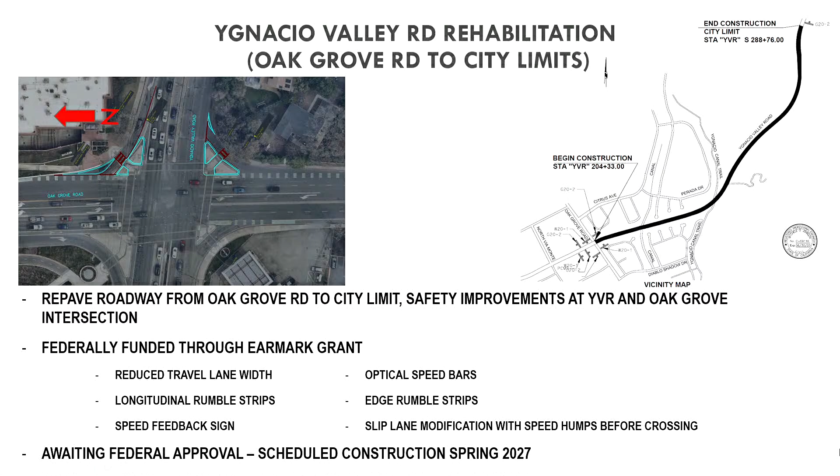Next, I have 2 projects to present here: both the unsignalized pedestrian crossing improvements and the trail crossing improvements project. The project scope includes the addition of rapid flashing beacons at the pedestrian crossings, as well as passive detection at the trail crossings.

This is funded through traffic impact fees and supplemented by the TDA grant, which we were awarded. Pedestrian improvements are at roughly 13 crossings, including Civic Drive, Tice Valley Boulevard, Bancroft Road, North Main Street, and Mount Diablo as well.

Trail crossings include the Contra Costa Canal Trail at Jones Road, as well as the Briones to Mount Diablo Trail at crossings at Larkey, Buena Vista, and San Luis Road. This is in efforts to increase visibility of pedestrians and trail users at crossings and lower vehicular speeds. We are currently in construction for this project. Thank you.

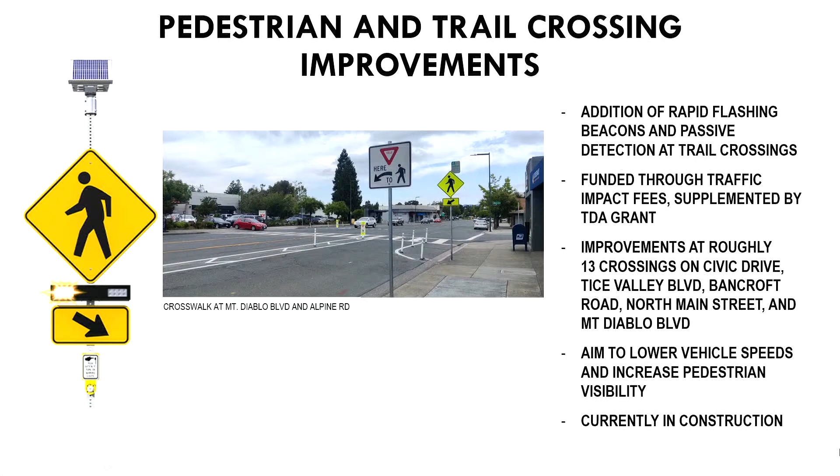Good evening, Commissioners. I'm Uriel Dominguez, with the CIP division. Today I'll be going over the project I'm managing this year, which is the 2026 slurry project.

This is funded through Measure J and the gas tax. This year we'll be slurry sealing approximately 43 streets in the Tampico, Diablo Shadows, and Valley Vista area. As part of this project, we are enhancing bicycle and pedestrian facilities. A good example of that is on Montego Road.

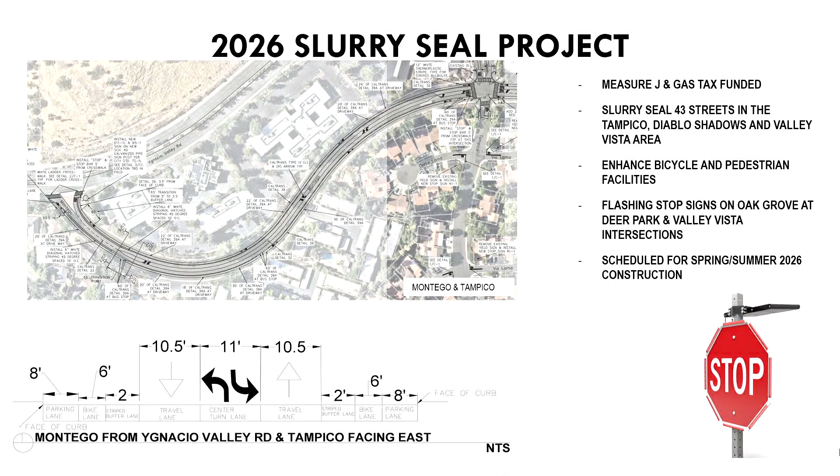Good evening, Commissioners. My name is Andrew McDade, I'm also an engineer with the CIP division. The project I'm managing, which was just awarded for contract this past Tuesday night, is the Walker Avenue Pedestrian Improvement Project. This will install curb extensions just east of the Iron Horse Trail crossing on Mount Diablo across Walker Avenue. We'll also reconstruct the curb cuts here, improve the landing, as well as ADA accessibility.

This will improve pedestrian visibility and reduce the crossing distance. Also at this location, we will raise the crosswalk a bit to create an undulation that will slow motorists down, especially coming around Walker from the east around that curve there. In addition to these improvements, we're also installing some reflective curb paint and upgrading the striping and signage, as well as installing an additional streetlight at this location.

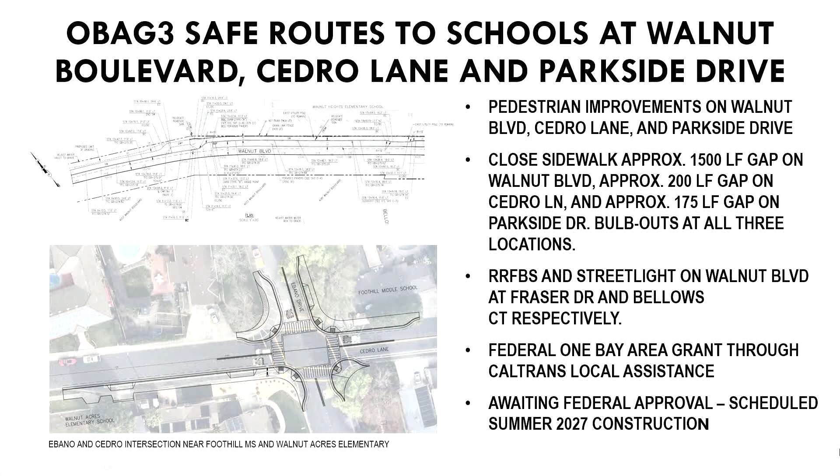And so with that, we've talked about our projects that are near construction, and we have a map here to show the various locations. I'll open up to any questions or comments before we move on to the next section.

Okay, great, thanks. So we'll open up for questions from the commissioners. First question on the bulb-outs - you're talking concrete, like raised sidewalk islands, correct? Yeah, if you look at the bottom picture, that's all concrete right there. Okay, so it's hard improvements that are physically reducing the lanes.

Okay, and then on the Ygnacio intersection, that was the first slide - just curious, do we have updated counts of how many vehicles and pedestrians are going through that? Our counts are not very updated, I think maybe 2019. Oh yeah, well the world has changed a lot since then. What do we have to do to get updated counts, at least at a couple of these intersections, the major ones in the city?

That's something we can consider. Yeah, we have to hire a count company, so it's just operating budget that we have to use to get some data.

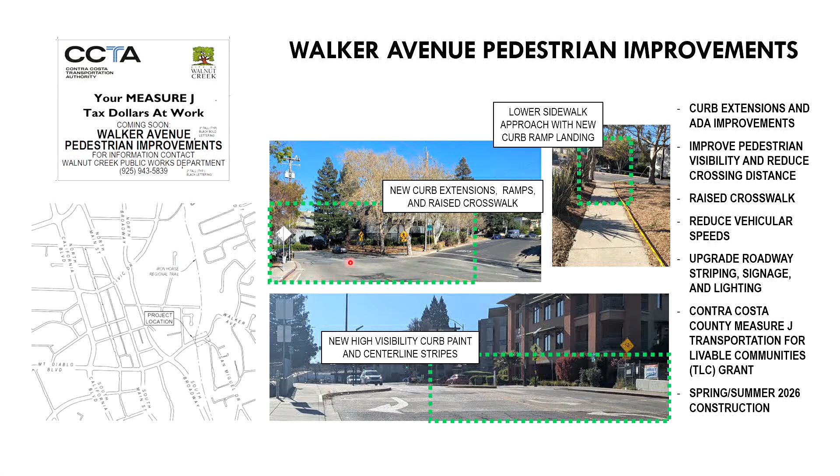So is the one that actually crosses the Iron Horse, is that also going to be raised? No, we don't have any plans for that right now. The only thing we'll be doing is painting some yellow reflective curb on the median there. That's more for nighttime driving than really any pedestrian benefit. But I think visibility is pretty good here. We have the bulb outs, but no, we don't have plans for raising that.

Okay, if we could leave this picture up, going back to the lighted signs, without a long time of questions, what's the process of choosing the street and deciding that one of those signs with the lights is going to go in? Which project are you referring to? So like the Iron Horse Trail crossing, right? It doesn't have a lighted sign right now, like what I'm looking at on this screen. Correct, that one does? The Iron Horse one does? That one does, yeah. Okay.

And these lights, when they get put in, is it a meeting? You guys just, how is it chosen? How are the areas chosen for those lights to go in?

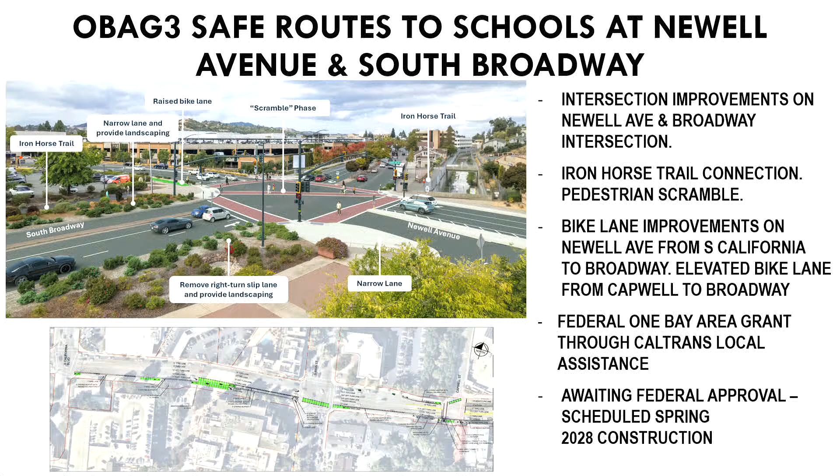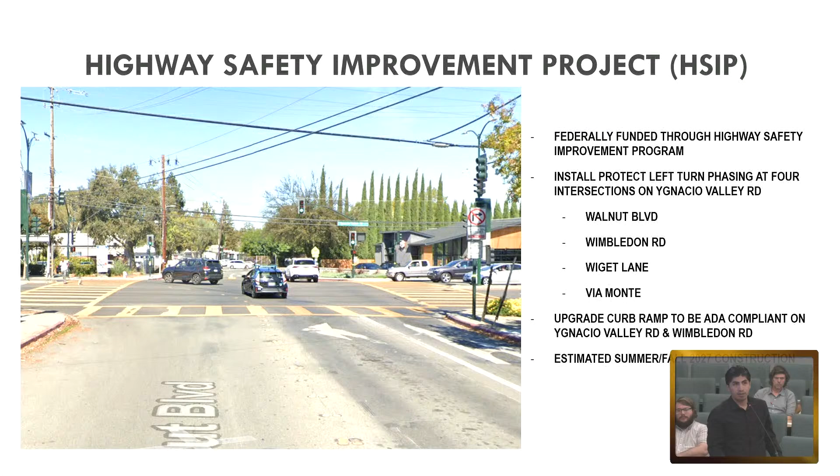Now for the Highway Safety Improvement Project, federally funded through the Highway Safety Improvement Program. This intersection is at Ygnacio Valley Road and Walnut Boulevard. We'll be doing essentially the same thing at Wimbledon Road, Wiget Lane, and Via Monte intersections, installing protected left turn phasing at all 4 intersections. The current condition is permissive left turns, as shown in the picture. We'll also be upgrading curb ramps to be ADA compliant on Ygnacio Valley Road and Wimbledon Road. Estimated construction is summer or fall of 2027.

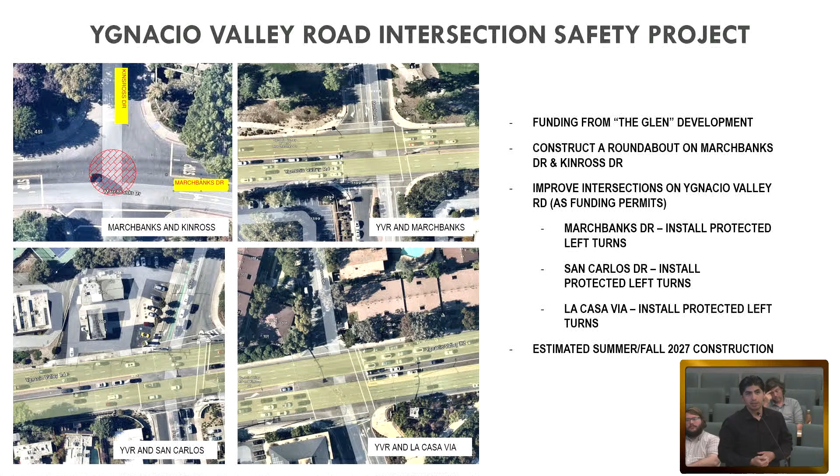The next project is the Ygnacio Valley Road intersection safety project, funded through the Glen development. Due to limited funding, we developed primary goals and objectives for this project, listed in order. Our primary goal is to construct a roundabout at Marchbanks Drive and Kinross, shown by the red circle in the upper left picture. Following that, as funding permits, our goals are to install protected left turns at 3 intersections: Ygnacio Valley Road and Marchbanks Drive, Ygnacio Valley Road and San Carlos Drive, and La Casa Via and Ygnacio Valley Road. Due to limited funding, we're prioritizing them in that order, and we expect construction in summer or fall of 2027.

Next up is the San Miguel Drive Pedestrian Path Project, a joint project between the City of Walnut Creek and Contra Costa County, currently in design. This is a county-led project, but we are responsible for improvements within our jurisdiction, funded through traffic impact fees. The intent is to close the sidewalk gap between San Miguel and Newell, up to San Miguel and Norris Road, providing better downtown access to residents in this area. Shown here is the intersection of San Miguel Drive and Andrea, where currently there's sidewalk on only one side of the road. We plan to install a 5-foot sidewalk, 8-foot wide parking, and 10-foot travel lanes where there is none now. We anticipate construction in summer 2027.

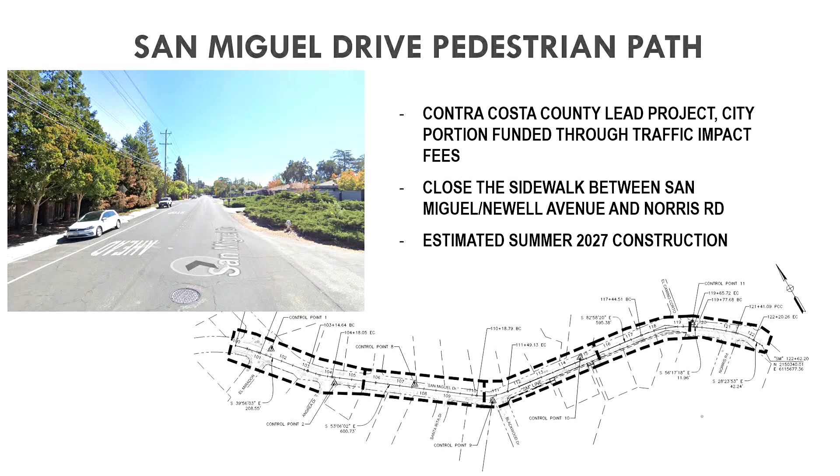Next, we have North Broadway improvements. This is funded through the Affordable Housing and Sustainability Grant. It's a redesign of North Broadway from Civic to Central, and we're aiming to right-size the corridor to better serve today's demand.

Right now, there are areas that do not have sidewalks along this corridor, and we plan to install sidewalks throughout, bulb outs at the intersections, Class 4 bikeways at sidewalk elevation, and reduce the travel lane width for cars. We anticipate spring, summer 2028 construction for this project.

This is going to replace the existing structure over Las Trampas Creek at South Main Street. It's going to be a 2-phased project. The first phase, we estimate construction in spring of '27, and it's going to build a pedestrian bridge, which will also act as a utility bridge on the eastern side of the roadway. The construction will have intermittent traffic impacts, but the road will be able to remain open.

Phase 2 of the project will be the following spring. Spring of 2028 is the estimated construction date, and that will remove the structure completely and be replaced with a new bridge structure. This is all under the Caltrans Highway Bridge Program, so it is funded through federal funding.

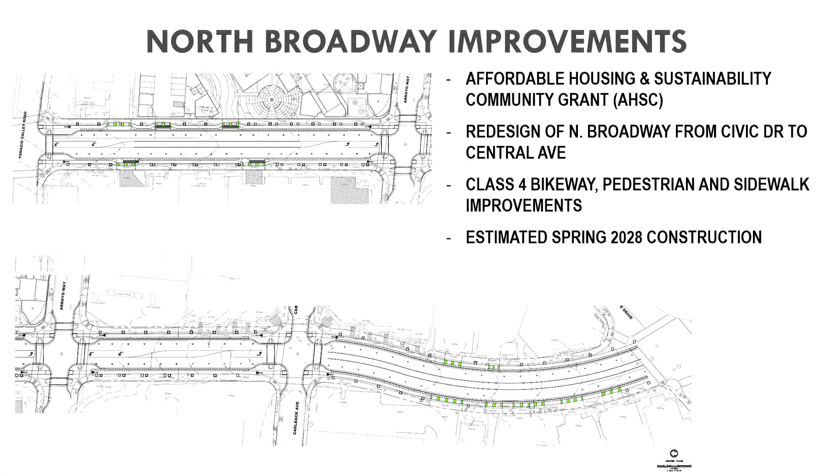And that's the first project. The second project I'd like to talk about is the bus stop improvement and shelter project. This is adding bus amenities to existing bus stop facilities and ADA access improvement at those sites. This is funded through the Contra Costa Measure J Transportation and Livable Communities Grant, as well as the AHSC Affordable Housing and Sustainability Community Grant.

We're going to replace or install shelters at 5 existing bus stops. These locations are at Ygnacio Valley Road and Marchbanks, Civic and Ygnacio Valley Road, Locust Street at Mount Diablo, South Main and Lilac, and the last one will be on North Main at Civic, right outside City Hall. The last, 6th location that we're going to be working on is just a mini plaza and ADA improvements at North Main and Bonanza.

That services our free trolley. One additional aspect on these projects is going to be real-time signage, so that the bus stop signage will tell users when the next shuttle or bus will be arriving. That will be installed on all 6 of the sites. Our estimated construction is spring of '27.

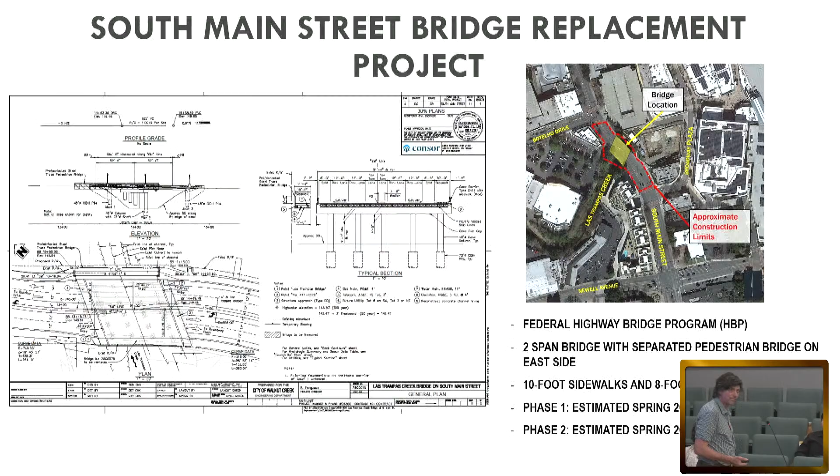Thank you. All right, was that all the projects, or you have more? No, I got 2 more. All right. Yeah.

This is the Parkside Drive multimodal improvements. The goal of this project is to provide improved multimodal access from the Iron Horse Trail to the BART station, providing an east-west connection from the Iron Horse Trail to the BART station. That's a connection I've been looking for a long time.

But really, the challenge of this project is to balance the different modes of transportation. Parkside Drive, from North Main to Civic Drive, is really a 4-lane through-lane street, and one of the lanes has to be converted into a multimodal use lane for this to work. So it's really about balancing what the impacts are going to be and seeing what's the best way to move this toward construction. Again, this is another Affordable Housing and Sustainability Community funded project, along with TIF, traffic impact fee funding. We're looking at this project for beyond 2028.

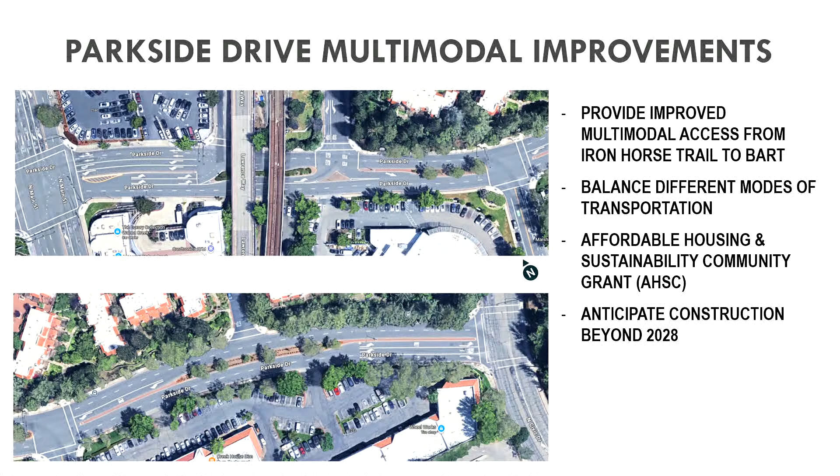So if you notice a theme between this and the Newell and Parkside projects, these are providing the east-west connections. We have the beautiful Iron Horse Trail going north-south, but again, the city lacks that east-west connection. So Parkside and Newell are trying to fill that gap. And for this, we are doing the analysis right now. We don't have results yet about which side or how these facilities would be on Parkside. And absolutely, there needs to be an outreach component, which will happen once we learn a little more about the options.

Okay, sounds good. Thank you so much. All right, Commissioner Guerrero. Thank you. So I want to stay on this one real quick.

So we're talking about the Iron Horse Trail that's down below Civic in the far right of the screen. Yes. And we want to bring that access to be able to cross over to BART at some point. Yes, it'll be a bike lane of sorts through Parkside onto Riviera. There'll be a connection piece on Civic to get from like Brio, probably somewhere over there, to this point. But that's an easier stretch to deal with than this stretch through Parkside.

Okay. Yeah, that's challenging is the word. Parkside and North Main is a pretty heavy-duty intersection to bring through.

Okay. And then the only other question I had was if we can go to the San Miguel one. We're going to put the sidewalks in on both sides, I think.

So, since this is my first time understanding this, what about the citizens? I mean, obviously, I know they probably enjoy sidewalks on their side of the property. But as far as, do we take into consideration the hydrants that are along here? What happens to the hydrants and where the sidewalk's going to begin and the bike lane is going to exist, and the narrowing of the lanes? Just curious about how you deal with those hydrants.

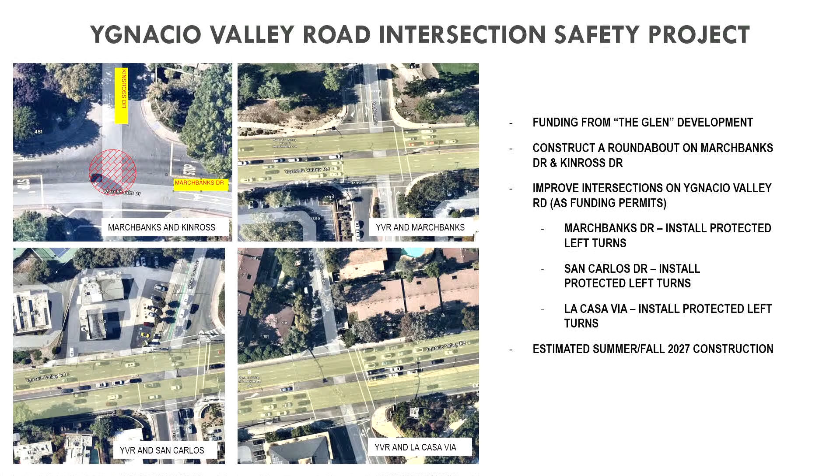So I know timing on YVR is a headache for all of you. Have you looked at how having a protected left turn in these 3 intersections will impact traffic and slow the through traffic? Because they'll have to stop more often, right, or longer, rather. Yes and no. I mean, it depends exactly where. Yes, we're adding another phase, and that could be additional delay. But let's not forget the goal of separating out the pedestrians crossing from left turn vehicles as we have now.

But let's look at Ygnacio Valley Road and San Carlos. Right now, the north side will go by itself, and then the south side will go.

When we change it, the left turns will go, the through will go, then the left turns from the other direction will go, and then the throughs will go. But the throughs can go at the same time as the left turns. So we still essentially have two concurrent phases that we have to get through before we can go back to Ygnacio Valley Road. And if there's no cars taking a through, we could even have a quicker return to Ygnacio. So it does depend, and that analysis will be looked at for all these intersections being modified as we go into design. We'll have an early estimate about what's going on, so we can tweak anything as we're designing it. Great, thank you.

Yeah. Like, it says bike lane. Oh, I get it, okay, I'm reading this wrong again. No, it's okay, these sections have a lot of detail there. I think that label could be shifted over, I think it's just pointed. But this is one example of a cross-section, and if you look at the colors, it changes throughout the corridor. So at one point you're looking at this cross-section shown, but at other sections it will change.

Okay, I know this isn't comment time, but just for public, I think updating this diagram would be useful. I'm done now.

Commissioner Ash, don't forget our tennis player here. So can you go back to the first slide? I just wrote my notes in order, and I just gotta, thanks.

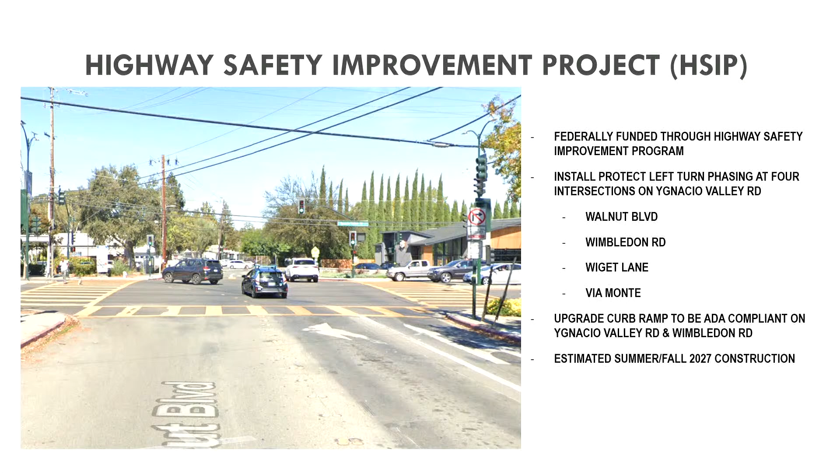I have a question. So I think on the west side of the intersection, where Wiget is crossing Ygnacio, there actually is no pedestrian crossing there. I believe there's some metal bars and a sign that says don't cross. Are we going to open that up and put a crosswalk there and then have a protected left turn for that one?

On some of these intersection improvements, we are trying to do that, especially on the next set of projects. But on Wiget, I don't believe we are.

No. Okay, because as a frequent user of that intersection, because we have the school over there now on the other side, the traffic has become pretty intense, both at the normal school times, and when you're crossing south to north, or from the residential side to the Shadelands side, it's really dangerous because you have a bunch of people barreling through straight to go back to the residential, as an example, from the school and the medical offices. But you can't really see them coming because the way it crowns, probably for drainage, the oncoming traffic that's about to turn left to go up towards Oak Grove, it really blocks the traffic that's coming straight through, and I'm surprised we haven't had more accidents there.

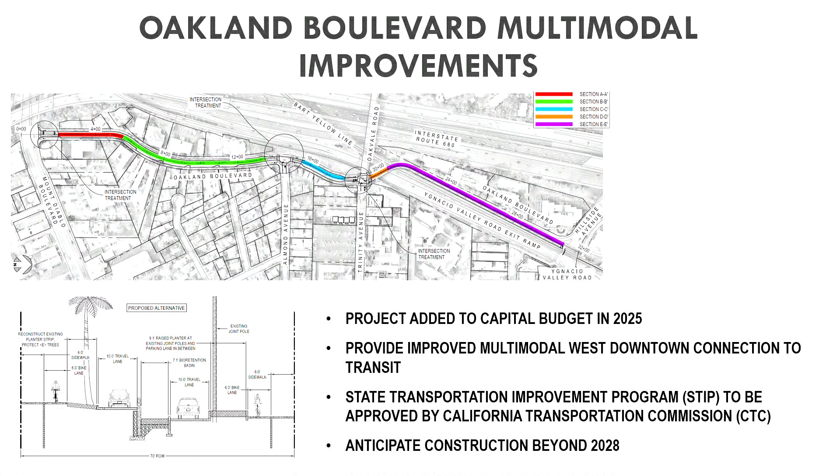I know this is a couple of years out, but if you turn left from Ygnacio today onto Oakland, you have that raised trail. I have literally seen in the last year three cars make the left short and go up onto the raised trail. I am terrified that I'm going to witness somebody there at that moment and the car not be able to stop in time. I don't care if it's a yellow, bright neon strip or something. If there's anything we can do today, instead of waiting until 2027 or 2028 for this project to come, please do something simple, because that is my nightmare of all the traffic here in the city, for some reason, because I've seen that happen and it's gotten close. So I just really want to emphasize that.

Anything particular with Ygnacio Valley Road, I love all those crosswalk improvements, how you guys are thinking about that. More than any road, that's a road we have to pay attention to, like timing impacts on things. So to be able to know what you have before, Matt, and what you have after you improve them, I think is something to consider, to be aware of, because signal timing goes all the way down. We're not changing one light, we have to change twelve on that. So I want to indicate that.

And then I feel like there was one other thing I wanted to say. Okay, I'll shut up, thank you. You can come back, if you remember, just let us know.